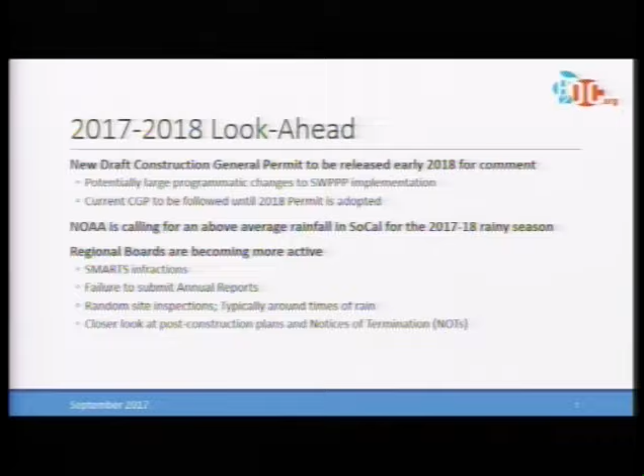First and foremost, I think the most important thing to start the presentation off with is a look ahead at the rest of this year, 2017, and into 2018. I think the biggest thing out there looming is the new construction general permit; a draft is anticipated to be released in early 2018 for comment. The thing to note with this is that there are potentially large programmatic changes to the SWPPP implementation. And I don't want to get too involved in it here today because, again, nothing's set in stone. It's a draft version, but I just wanted to make sure that all of you are aware that after about 10 years, there's finally a new permit coming out.

We're not expecting a lot of changes. It's still going to be a risk-based permit, but there will be changes to inspection requirements, sampling protocols, certifications, and stuff of that nature, which could affect your programs. So be aware of that. In the meantime, the current CGP should still continue to be followed until the 2018 permit is fully adopted.

Another thing to note going into the rainy season is that NOAA is calling for above average rainfall this rainy season. Not expecting as much as last year. Last year was a record year, especially coming out of a period of 5 or 6 years of drought, but we are ramping up and expecting a lot of rainfall. So good that you're all here. Get a refresher on the requirements of your programs, a refresher on the BMPs that you guys will be inspecting and following. So be prepared for some rain.

And then lastly, I just want to touch on the fact that regional boards are starting to become active. In the first 7 years or so of the permit being implemented, we were in a drought. We didn't see a lot of action from the regional boards. There just wasn't much to inspect. Not a lot of runoff, no sampling data, but now that the state has more funding, pushing that out to the regional boards, and we are starting to get rain and discharges from our sites, we're seeing an uptick in activity from regional boards.

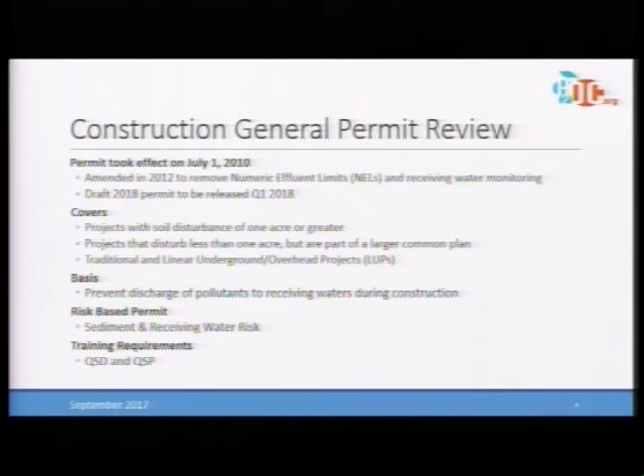It also covers projects that are less than 1 acre, but part of a common plan of development. So the idea behind this was they didn't want land developers to come out and piecemeal segment each one of their pads into a separate project, get permit coverage that way. They have to obtain coverage for their entire site.

And again, it covers traditional projects, which are your typical land development projects. Probably most of your projects are falling under the traditional realm, but we also have linear underground and overhead projects. So your transmission lines, any pipeline projects that are spanning over a length.

The basis of the permit is to prevent the discharge of pollutants into receiving waters during construction. So the most prevalent pollutant on construction sites is obviously sediment, but we're dealing with oils and greases, petroleum products, paints, concrete, and sediment actually acts as a cohesive binding agent, and so these other pollutants will actually attach to the sediment particles and more readily run off the site. So we're mainly focused on sediment here, but note that we're looking at all pollutants coming off a construction site.

Touched on the fact that it's a risk-based permit, and then it has training requirements. So there's QSD, Qualified SWPPP Developer, and QSP, Qualified SWPPP Practitioner, the official designations to implement this permit.

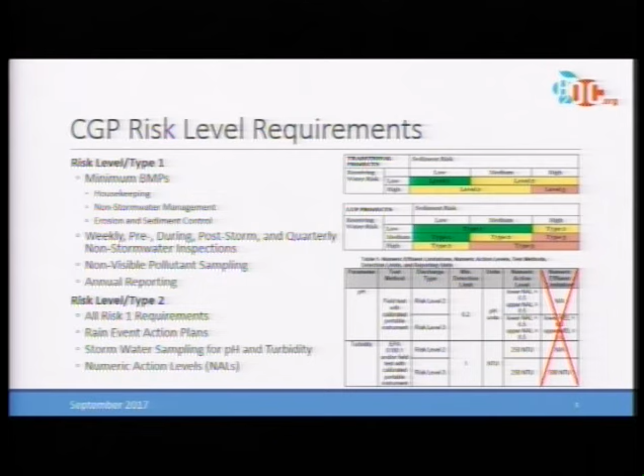We'll also be doing stormwater sampling for pH and turbidity, and we'll be dealing with numeric action levels, shown in this table here. The NALs for pH are between 6.5 and 8.5, so if you're outside of that range you have an exceedance. Turbidity is greater than 250 NTUs.

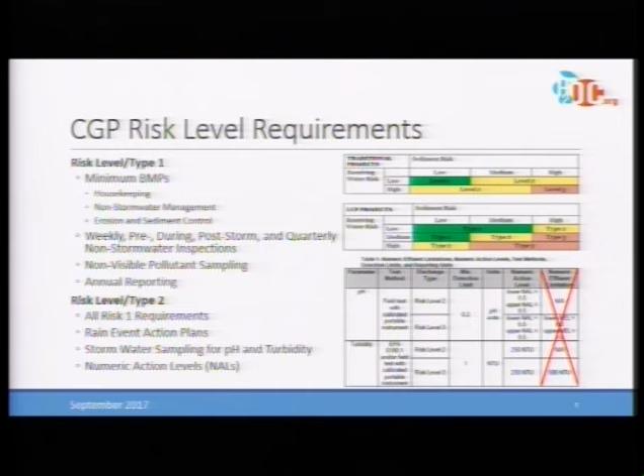What that means is, if we exceed it, we will upload the data to SMARTS, and then it's up to the board if they want to enforce an exceedance action report. Very seldom do they come out with that, but just be aware that if we do have an exceedance, it's not an automatic slap on the wrist. It's just a wake-up call that we might get a notification from the regional board, and that we should be looking to correct the site or any problems we have.

CGP training requirements: SWPPPs, Stormwater Pollution Prevention Plans, must be developed by a qualified SWPPP developer. This entails a 3-day training course. You have to pass the QSD exam, which is basically an exam on the construction general permit covering all the ins and outs of the permit, and then you must have an underlying certification. So Certified Professional in Erosion and Sediment Control, or your PE licensure, will get you there.

To implement a SWPPP, you have to have a qualified SWPPP practitioner, or QSP. A little bit more lenient than the QSD route, it only requires a 2-day training course, the QSP exam, and an underlying certification such as CESSWI, Certified Erosion Sediment and Stormwater Inspector, or CISEC. So a little less experience, more of the practical side, less of the development side. If you're interested in more information on how to obtain licensure, I've included a link here for your needs.

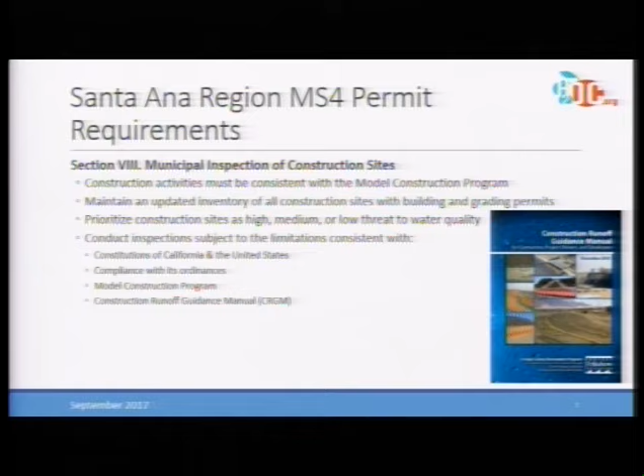There is draft language out there that they will be looking into aligning the priority scheme with the CGP, in that you'll be looking at receiving waters, what your site sediments or soils are, slopes, project size, and stuff like that, to prioritize the sites even further.

The permit also requires that we conduct inspections that are consistent with the constitutions of California and the United States, compliance with its ordinances, again our model construction program, and the construction runoff guidance manual, which is included here on the graphic.

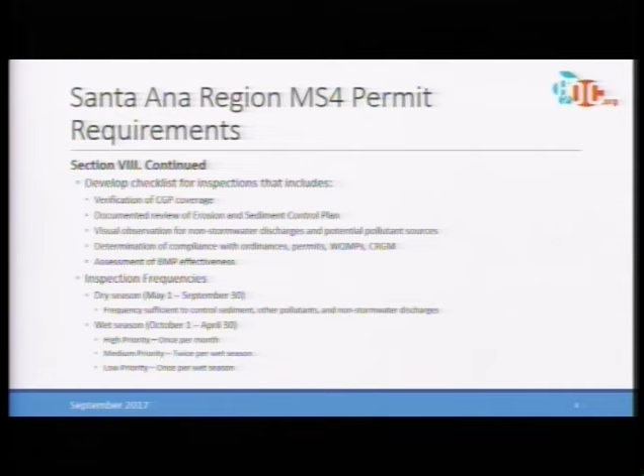Continuing on, you should have developed an inspection checklist that includes verification of the CGP, the WDID number, if the project has CGP coverage. If it doesn't, we need to identify the erosion control plan, making sure the BMPs called out in that plan are adequate for the phase of construction and the season we're in, just making sure all the BMPs are accounted for.

We'll have a section on visual observations of non-stormwater discharges, determination of compliance with ordinances, post-construction requirements, and obviously the most important thing when you're out there, the assessment of BMPs on site.

The permit goes on to explain the inspection frequencies. In this permit, the dry season is officially defined as May 1st through September 30th, and your inspection frequency would be sufficient enough to determine that you're basically in compliance, with no sediment discharges or other pollutants getting off site.

For the wet season, October 1st through April 30th, high priority projects are inspected once a month, medium priority projects twice per wet season, and low priority projects once per wet season. And this is the bare minimum, remember.

I highly encourage more active inspections. It's always good to get out there once a rainy season, twice a rainy season, even if the project's low risk—that just doesn't seem enough. The construction changes daily, the activities change daily, there's always something that's going to go wrong. So especially with the uptick in regional board involvement, I highly encourage more active participation and more active inspections on these sites.

The permit also requires consistent enforcement for non-compliant sites. We have to enforce ordinances and permits at construction sites, modifying our local implementation plans to identify enforcement linkage to the regional board—sanctions, a written enforcement order at the time of inspection, and any other appropriate actions we need to have the contractor follow.

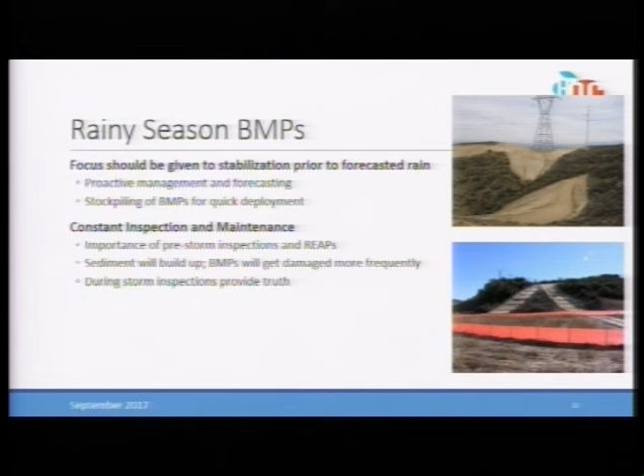The preservation of existing vegetation should be our number one key. The less we disturb, the more success we're going to have with retaining sediment on site and reducing erosion.

I also get that it's not entirely practical to schedule all construction outside of the rainy season. The bird nesting season, which governs over everything and halts construction more often than not, runs February through August—that leaves the rainy months to start grading. So it's kind of converse to what logic would say: we don't want to be grading during the rainy months, but the reality is that we end up exposing large amounts of sediment during the rainy season.

Work with the contractors, understand their schedules, track the weather forecasts religiously, and make sure that you are coordinating to the extent possible to minimize what's exposed to the weather.

Also, I think a huge thing is stockpiling BMPs on site. You go out to a construction site, they don't have enough BMPs, BMPs get thrashed, or you have a violation. During the rainy season, it's hard to come by BMPs in some of the time periods that you need them. 48 hours to get 6,000 linear feet of fiber roll on a slope—it's probably not going to happen. So I really encourage the contractors and you guys to push the stockpiling of BMPs on site for quick deployment.

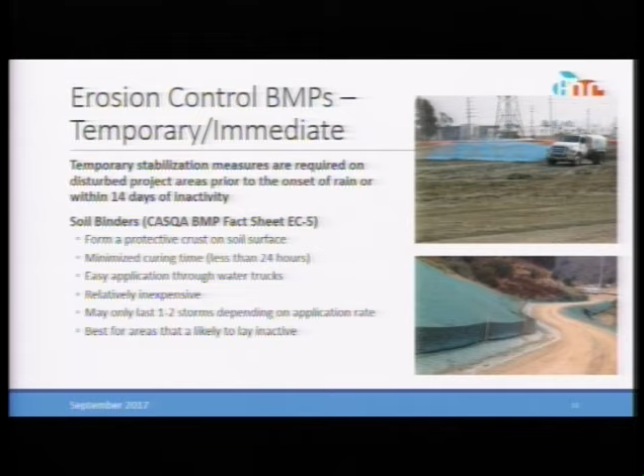The benefit of this is it has a minimized curing time, less than 24 hours. A product I really like to use is called EarthGuard Reap. They state you can apply it during a rain event—I don't know if I'd go that far, but I've done it less than probably 2 hours prior to a rain event, and it hardens onto the slope and works really well. Easy application: you can put it into a water truck, you don't have to get the huge hydroseeding trucks out there with the hoses. You can mix it in a water truck and just spray it on the site. So very easy application, very quick curing time, relatively inexpensive.

The only downside is you're not going to get a lot of extended use off of it—maybe 1 to 2 storms depending on how thick the application rate is. The best use for soil binders is on slopes or disturbed areas that are likely to lay inactive. What you don't want to do is protect a slope prior to a rain event, but then have the contractor come and do grading right after, because that's just going to destroy the binder that's on the soil—it's kind of for naught. So areas that are finished, awaiting final stabilization, are a great use case for soil binders.

Another great product would be geotextiles or mats, BMP fact sheet EC7. We also refer to them as visqueen covers. It's a quick solution for when curing times aren't available.

So if you don't have soil binders stockpiled on site or readily available, and there's an impending rain event, if you have plastic sheeting on site, you can throw that down relatively quickly. It's a little bit more robust, and it's going to last a little bit longer than soil binders, just due to the thickness of the material.

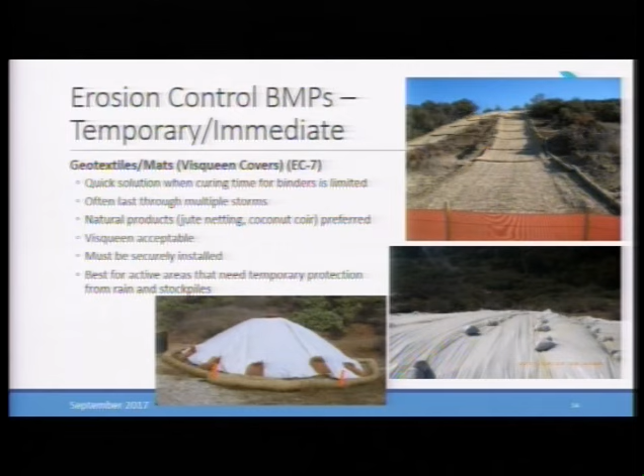But visqueen is acceptable. The CGP, the permit, will allow for plastic. They specifically state that it's to minimize the use of plastics where applicable, but it is acceptable.

But one thing to note with covers is that they must be securely installed. When it's raining, we often experience winds that pick up the covers. So make sure that when you're using plastics, they're securely fastened to the ground. We don't want to cause any extra hazards out there.

These are more for your active areas that need temporary protection, so stockpiles are a good example. You need to cover it prior to a rain event. You don't want to put a soil binder down because after the rain event you're going to come and disturb it again, so just cover it quickly with some plastic.

Slopes that you're going to be continuing to grade, use plastic over a soil binder.

Moving into more of a temporary to permanent control, we have hydraulic mulch or a bonded fiber matrix, BFM, BMP CASQA fact sheet EC3. What this is, it's a wood or paper fiber that's bound with a polymer tackifier and that's going to be sprayed on the ground similar to a hydroseed or a soil binder.

It comes out a lot thicker. It kind of looks like wet cotton candy that's just slapped on the ground. It's pretty thick, looks messy, but holds up really well.

This will last a lot longer than soil binders. You can get an entire rainy season out of it, even longer. The downside is it does take a longer time to cure, 24 to 48 hours in most cases. It's applied via a hydroseed truck.

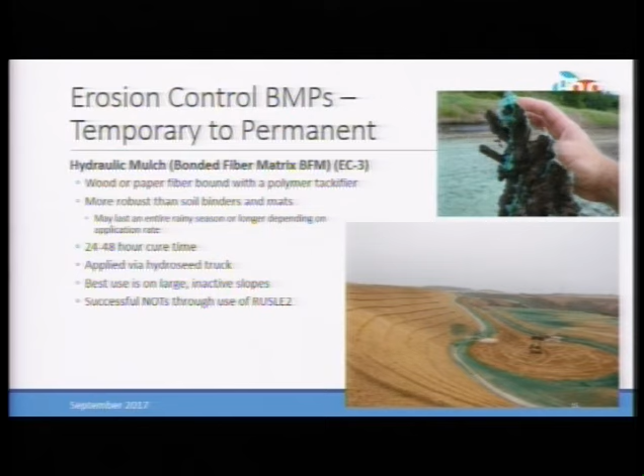With that being said, it's not accepted as a form of vegetation for final coverage. So if you are trying to terminate a SWPPP through the 70% coverage method, the BFM won't work.

However, we have had successful NOTs using RUSLE 2. So if you guys are familiar with the revised universal soil loss equation, it's a different method that you can use in the CGP to close out coverage.

Basically, it's a calculation that determines how much sediment yield you're having from your construction site. The BFM product meets those calculations, so in a way it can be used for final stabilization and NOT closeout.

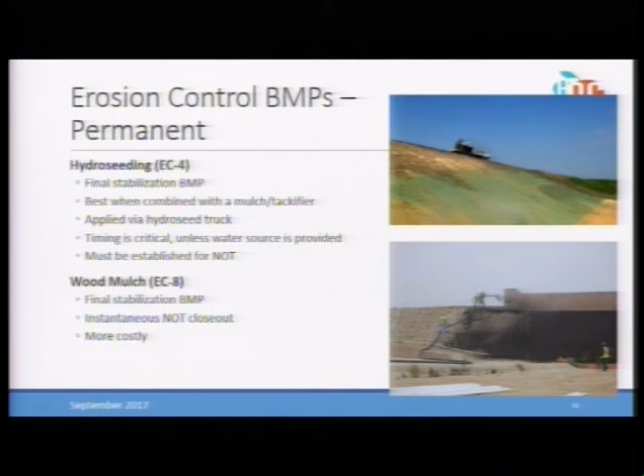Permanent erosion control BMPs, we're looking at hydroseed and wood mulch. Hydroseeding is best when it's combined with a mulch or tackifier. We don't want to just spray seed on a slope. It's not going to stay in place.

After one rain event, it's just going to get washed away. So make sure if they are hydroseeding a site, they have some kind of tackifier in there, something to hold it in place. The timing of this is critical.

More often than not, construction projects will finish during the summer, and we'll see contractors go out and hydroseed a slope in the middle of summer and then walk away with no water source. I don't know how you're going to get any growth without any water.

Ideally, you'd apply it in the rainy season, to take advantage of the rain that you can get. Otherwise, if you're going to apply hydroseed, make sure that you have some kind of water source on it, at least for the first month or two until you have some vegetation coming through. But we need to have actual growth coming through in order to close out a project.

The last one, wood mulch, it's a great product, very expensive, but gives instantaneous closeout. You spray it on and you can get closeout from the CGP.

All right, so moving into sediment controls. These are probably the ones that you're most familiar with.

But again, erosion control is number one. 85% of your success rate is going to come from erosion control. The last 15% is sediment control. I think that's converse to what our knowledge tells us. We go out to these sites and see tons of gravel bags and extra fiber rolls, but really they're our last line of defense. We can't rely on them to keep all the sediment on site. If we have a huge slope failure with a lot of sediment running down, these BMPs are just going to get overwhelmed and we're going to have to replace them.

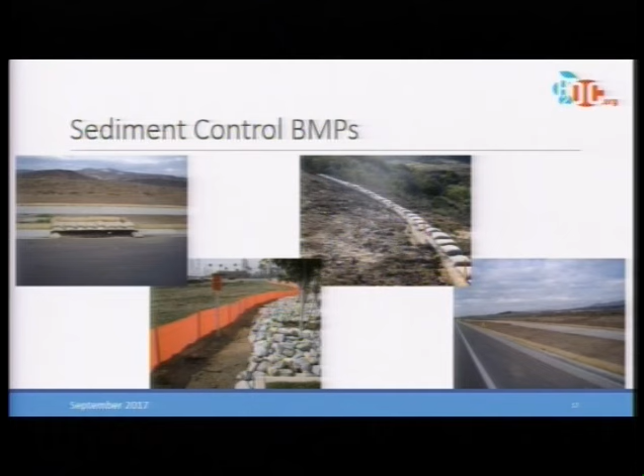Coming into some other ones, my personal favorite is the cutback curb. If you're familiar with SE3 sediment traps, the cutback curb is kind of like a mini sediment trap. A lot of home developers use this where they'll grade down about 3 to 4 inches behind the curb and essentially form a mini sediment trap for each housing lot. This saves a lot of overall BMP maintenance. Instead of installing silt fence, they just have that extra holding capacity behind the curb. So that's a good one to use.

Storm drain inlet protection is another good one to use. However, we're seeing more and more often requirements to remove this during the rainy season because of flooding issues. If that's the case, we typically like to have the filter fabric down and the gravel bags blocking it to catch dry weather flows or any dust. But prior to a rain event, we'll want to make sure we're pulling that back, not impeding any water.

But if we do that, we need to make sure we're controlling the source. So if we're taking the control away from our discharge point, we're going to have to make up for it somewhere else—maybe with an extra perimeter control on our site. We have our fiber rolls, straw wattles, silt fence, I guess a combination.

Something we can use in place of silt fence would be ERTEC S fence. I think it's a relatively new product, but it's very robust. It's a lot better than silt fence—cheaper, easier to install, and you can get a lot more use out of it. I've seen people pull it out at the end of a construction site, shake it out, and then use it on a completely different site. So ERTEC S fence is a good option to look into.

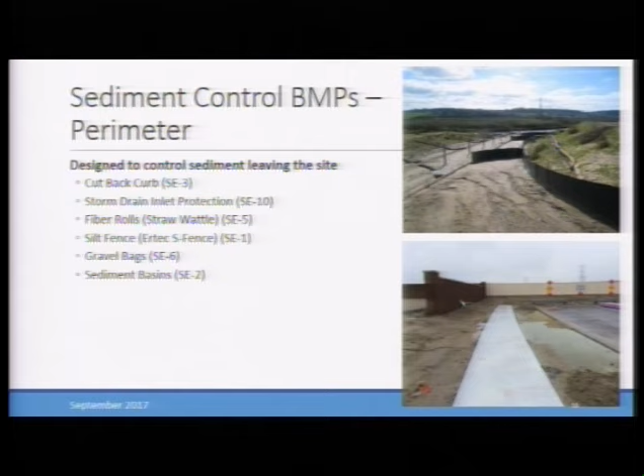So how do we mitigate that? We install silt fence check dams every so often going down. You're going to have the water concentrating along the backside of the silt fence, protecting the hillside, but you're also going to have check dams to slow and break up the concentrated flow path as it goes down the access road.

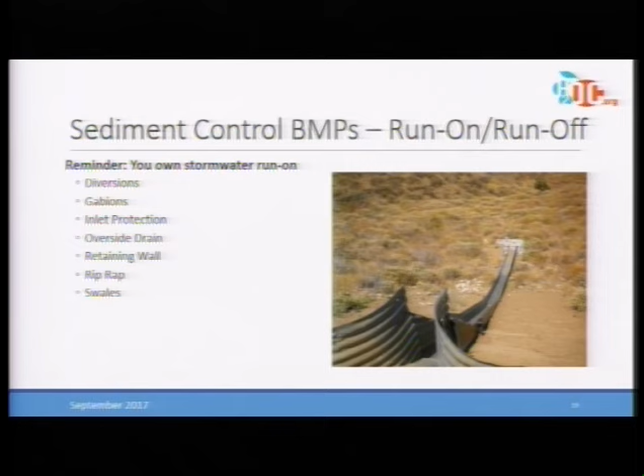A reminder that under the permit, essentially any run-on that's going onto your site, you own it, so best to divert it around your site as much as possible. If not, make sure it's clean when it comes on and clean when it goes off. So how can you do that? You can have diversions, gabions, you can pipe it through your system, or just have a robust system of perimeter controls to make sure that everything coming onto your site is as clean as possible.

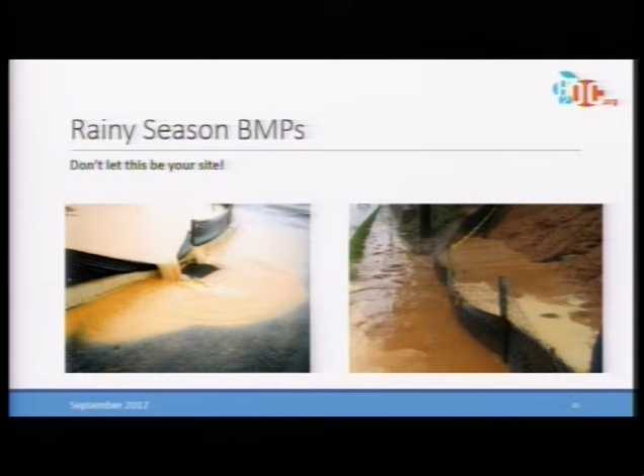So this is a couple pictures of where we don't want to be. We don't want our silt fence with that murky water coming over and going straight into the storm drain. That's a big no-no. The public can see that, and that's going to raise a lot of issues. All right, any questions on BMPs? All right.

All right, so moving into inspections. The purpose of the inspections: we want to identify and correct BMP failures, but we want to go a step further and be forward-thinking. We want to be able to identify and correct potential failures as well. Like I mentioned earlier, it's a lot cheaper and time efficient to identify problems before they start. So when you're going out to these sites, don't just look for something that's happened in the past, but look for areas that might be a potential source for failure in the future.

Pay attention to where sediment's building up, or if you see a rill forming, make sure that we're addressing that before it becomes a larger issue. And then obviously we have to do this as part of the MS4 permit that we're working under. What are we inspecting? We're inspecting areas that haven't achieved final stabilization. We're going to be inspecting our erosion and sediment control BMPs and our housekeeping BMPs.

This is a thing that's commonly overlooked. We go out there thinking, okay, we need to check the sandbags, the gravel bags, make sure they're all buttoned up, but we fail to look at the contractor's yard, and that's one of the main sources of pollutants: where the equipment's parked, making sure that everything underneath the equipment is clean, there's no leaks or spills, proper trash pickup on sites. So really going into the nitty-gritty, the housekeeping issues are equally important on sites.

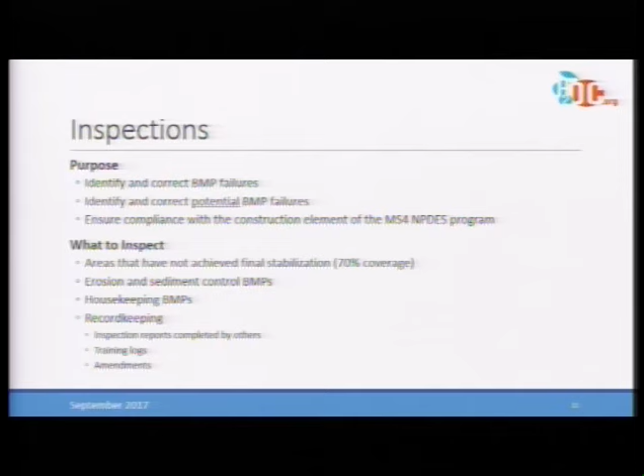And then record keeping. We also need to be cognizant of the record keeping that the contractor is doing. Are they completing their inspection reports? We mentioned that the CGP requires weekly inspections. Is the contractor doing this, and is it stored in the on-site SWPPP? Are they providing the training that they need to? Anytime a new contractor comes on site, they need to be trained, and that documentation should be kept in the SWPPP. Are there any amendments to the SWPPP?

Has the SWPPP expired? Should they have done a COI to extend coverage? Have they removed any project areas? All that stuff should be kept in the SWPPP. The SWPPP is a living document. It needs to be updated consistently, and it needs to reflect the exact site conditions. So when you're going out there, look at the site map on the wall. Make sure the BMPs that are called out there match in the field.

All right, so how do we inspect? I know we become creatures of habit, but the most important thing is safety first. The CGP actually put statements in there saying that if you feel unsafe at any time, you don't have to go out and inspect. You just need to fill out an exemption record. We all want to go home at the end of the day, so make sure that you are conducting these inspections safely.

I think that starts when you get on site: make sure you always check in with the construction site manager. It's not only courteous to do that, they want to know who's on their site, who's walking around, but you can get a lot of valuable information out of the construction site manager. It's probably been a while since you were last on site. Conditions might have changed, construction activities might have changed. It's good to walk through and ask about any additional hazards, any areas that are off limits that you can't go and walk and inspect.

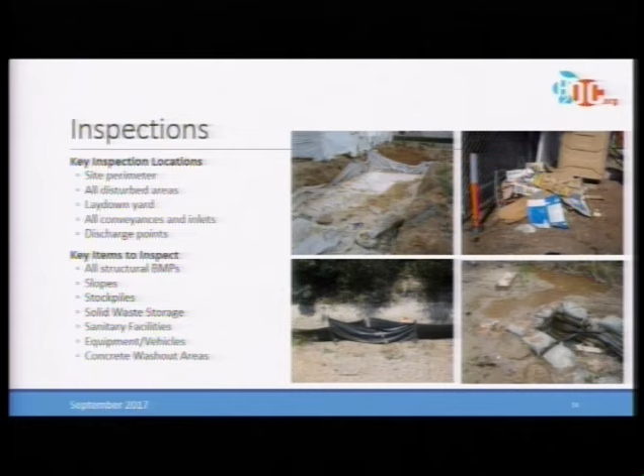We want to look at slopes, going back again to the importance of making sure that everything's staying on the slopes. That's our first line of defense. Stockpiles, solid waste storage areas, sanitary facilities, equipment and vehicles, and then concrete washout. Any experiences from you guys that you want to share with what you've seen out on sites, or any questions on inspections? Okay.

All right, so let's get into managing a site proactively. I think this can save a lot of money, a lot of headaches if done properly. So the first thing that you want to do is really understand the permits. And I know this permit's been around for 7 years or so. You have your programs in place, you have everything that you've been doing for the past years, but note that there's always gray areas. There's always different interpretations.

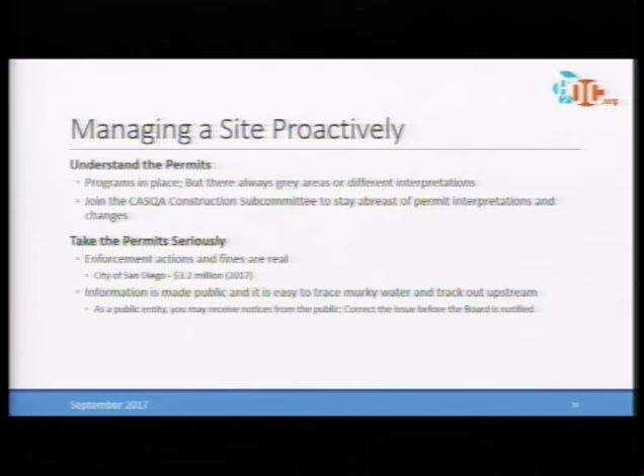Different regional board inspectors, there's turnover in staff, there's different things going on, and so there's always going to be different interpretations. So make sure that you understand the caveats of the permits, how different types of inspectors interpret things, and just really understand that. Another thing that I encourage, if you have the time, is joining the CASQA Construction Subcommittee. This is a subcommittee that has a conference call once every 2 months, and they'll discuss the inner workings of the permit, any gray areas that come up from discussion, any changes that might come in the 2018 permit.

They'll go over that kind of stuff and keep you updated on what their interpretations are from experience working with cities, working with the counties, working with regional boards. So you might find some good tips in those calls, and it's free to join.

The next thing is take the permits seriously. Enforcement actions and fines are real, and I think the latest example of that is the city of San Diego. Last year it was fined $4.5 million. They fortunately got that reduced down to $3.2 million, but that's still a lot of money.

And the important thing for us to know as the city agencies, a lot of these fines are often passed back to the contractor for negligence and not following the spec language. But this fine in particular was issued to the city of San Diego for programmatic errors and inspection shortcomings. So the fines are out there, they're real, and they will come after cities as well. And this one, I don't think that they can pass off any of the fines to contractors, because this was due to their own negligence.

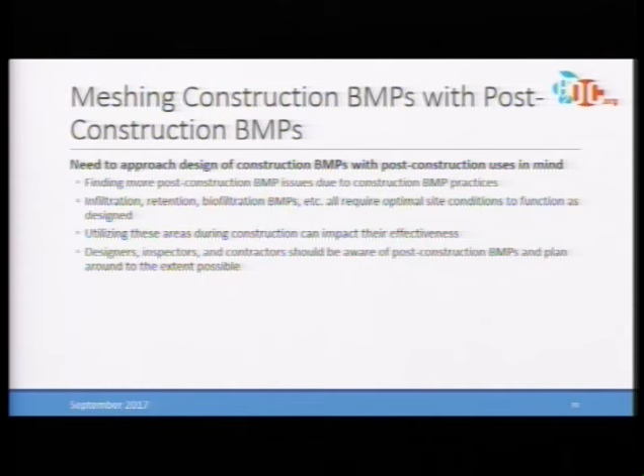All right, so I'll briefly go through this. I know Brent's going to talk about this, he has some pretty good examples, but one of the issues we're seeing with our sites during construction is post-construction BMPs—water quality basins, pervious pavements, anything that needs infiltration or biofiltration. We need optimal site conditions; we need the soils to be able to infiltrate. When we're going in and doing construction, typically we'll compact soils down, we'll be driving equipment where we shouldn't be, and we'll be adding extra sediment that's going to clog the pore spaces of these proposed post-construction BMPs. So it's another thing for us as inspectors when we're out on sites to understand what these post-construction BMPs are, where they're located, how they work, and how we can mitigate any issues arising from construction into post-construction.

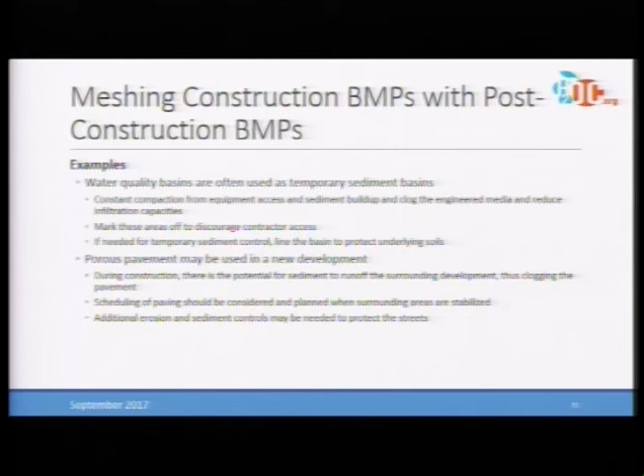So looking at the examples—a water quality basin going in, you're going to have constant traffic from vehicles going back and forth. It's going to compact down the soils, reducing infiltration capacity. You're going to have sediment coming down that you're storing from a rain event, and the fines in the sediment runoff are going to clog the infiltration capacity of the water quality basin. So how can we mitigate that?

We can discourage access by putting up ESA fencing or some kind of designation saying, once we've graded this basin, you can't access it. If we are going to use it for temporary sediment control, just make sure it's lined so we're not clogging up the soil underneath.

Porous pavement, scheduling here is a big one, and I know Brent will talk about that. So just make sure that when you are putting in pavements, if there is active construction going on, we have proper BMPs in place, perimeter control BMPs, sediment control BMPs to prevent as much sediment running off into these streets, clogging the pavement.

Any questions on post-construction?

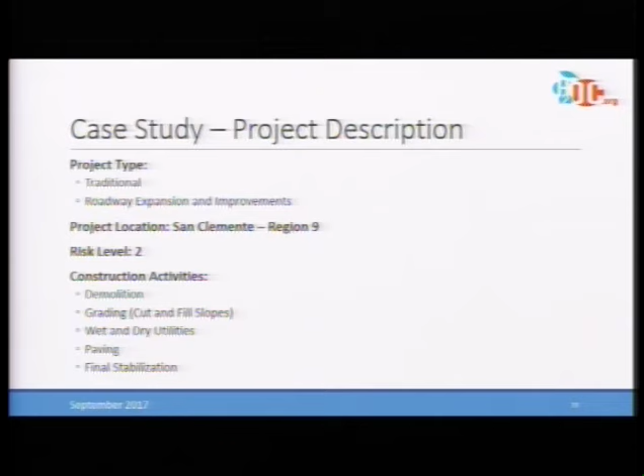All right, so we'll look at a case study project. This happened last February. It's a pretty large, traditional project. It was a roadway expansion project, roadway expansion and improvements. 34-acre site located in San Clemente, which is Regional Board 9, San Diego region. It was a risk level 2 project, and the construction activities included demolition, grading of cut and fill slopes, wet and dry utilities, paving, and final stabilization.

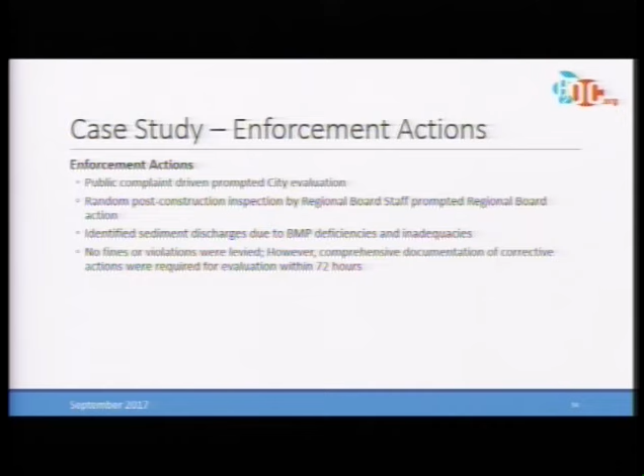So in February, we had a pretty large storm event, and we received 2 different complaints. We had one complaint from the city, which was enacted by the public. There had been some sediment discharges onto an adjacent property, and so they had contacted the city. The city came out, did an inspection, saw that, hey, yeah, they are right. There's a lot of sediment coming from this construction site onto this private property.

We also had a random post-storm drive-by by one of the regional boards. Luckily, they didn't go onto the site, but they drove by and they noticed the risk level 2 project was missing a lot of BMPs, no slope controls, especially prior to a rain event. There was exposed soils. There was missing BMPs. BMPs were damaged. So pretty much everything that could go wrong went wrong, and we got an enforcement action from the regional board.

Luckily, there were no fines or violations issued. It was just comprehensive documentation that they wanted to see. They gave us basically a 72-hour window to get corrections out there. I mean, 72 hours on a 34-acre site prior to the next rain event is still just a time crunch.

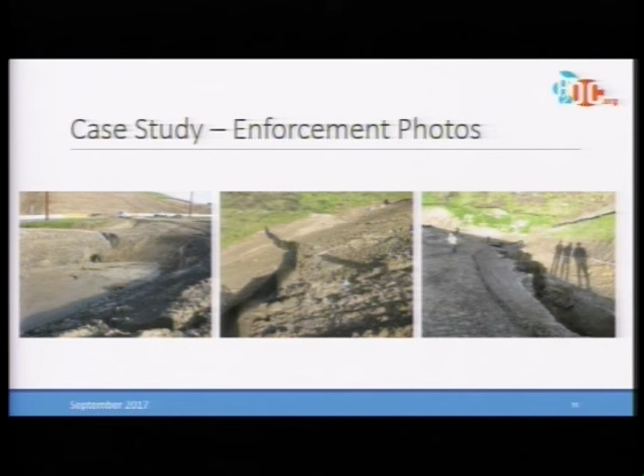Looking at these, the furthest left is kind of the perimeter of the project, culvert going under the roadway there, but you can just see the amount of sediment that's building up and clogging this culvert, but really no BMPs in place. All that sediment's running off onto private property. Terrible. We can't have that.

The middle photo, in the foreground, we're showing just some rilling and some erosion happening along that slope. And then if you look at the large slope in the back, you can see that it's completely missing any face controls. No sediment BMPs. That's probably a 2-to-1 slope, if not steeper, and the permit requires for risk level 2 that face controls be installed every 10 feet.

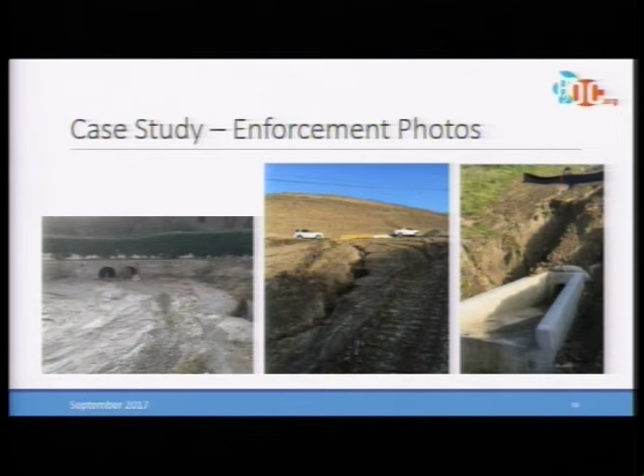We have nothing. And then the far right picture shows kind of an outlet structure, but you can see that no water's getting directed into the pipe. It's all diverted around. It's creating major erosion, and it's decreasing the integrity, or hurting the integrity of that system right there.

Very, very terrible site. And it kind of goes back to us, not only the first line of defense is going to be the QSP, the contractor's QSP, but us as inspectors, how do we let stuff like this go, especially in the rainy season? So we need to be aware, we need to be proactive, we need to be on top of it.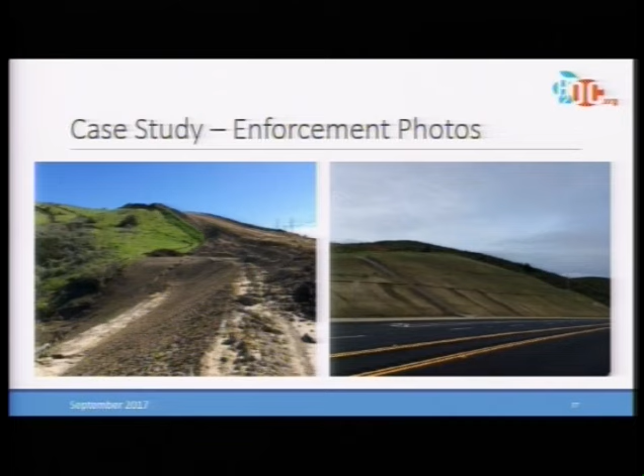What we could have done there, conversely, is install burlap wrapped fiber rolls. Those can be left in place long term, they'll biodegrade over time, but that would have been the solution there. In this case, we had to go out, have them rework the slope, compact it, reseed, and reinstall the burlap wrapped fiber rolls. A case of something that can happen is you think a slope's done, it's been hydroseeded, but it's not fully stabilized until it's actually stabilized.

So what did we do? We didn't make excuses. We got together as a team, did a comprehensive site review, involved the contractor, the contractor's QSP, county personnel, and county inspectors. We all met together, got in the same room, went through the permit requirements, identified the shortcomings, and put a game plan together, all within 72 hours.

We realized that 72 hours wasn't enough time to get this all implemented prior to the next storm event. So we came together with a game plan to identify the immediate threats, the most important things we could address before the next rain event: cleaning the clogged storm drains, removing sediment buildup in the basins and behind controls to give us extra capacity, installing sediment controls along the inactive slopes since that was a huge comment from the regional board, and adding temporary stabilization to active slopes.

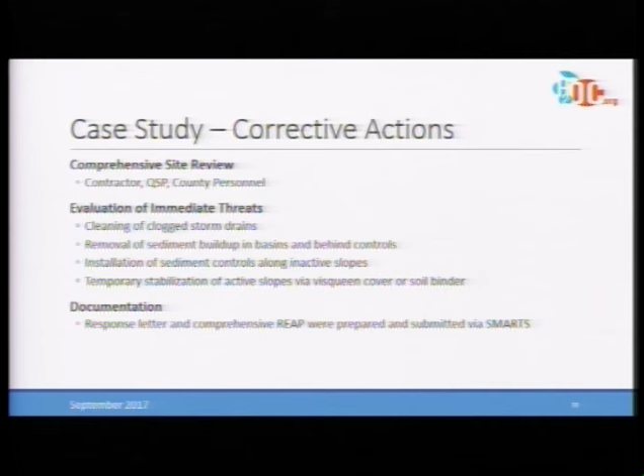You can see in this photo here. The left picture is a good example of working with the contractor. After talking, we told them, okay, you're going to have to stabilize this entire slope. They said, we're still actively working it. After this storm event, we're going to go out there and regrade it. So we said, okay, well, what can we do to minimize the potential for sediment to come off this slope?

What we settled on was building a berm along the edge of the road and directing all the water down to the spillway, you can see the Visqueen spillway there. So instead of having the water run off directly down the slope into the culvert, we directed it towards the spillway, and then we had additional BMPs at the bottom. Not necessarily permit specific, but it was a compromise we were willing to make in order to keep construction going and meet compliance.

The picture on the right shows a slope they were actively working, so they chose not to hydroseed it or put a soil binder on it. They decided to put down an enormous amount of plastic instead. They figured it was more cost effective to put the plastic down and then rip it out and go back to grading rather than applying soil binder every 5 days, because it seemed like we were getting rain every 5 days last year.

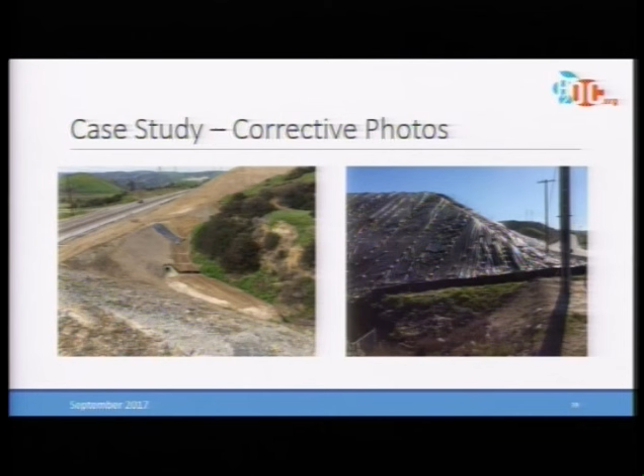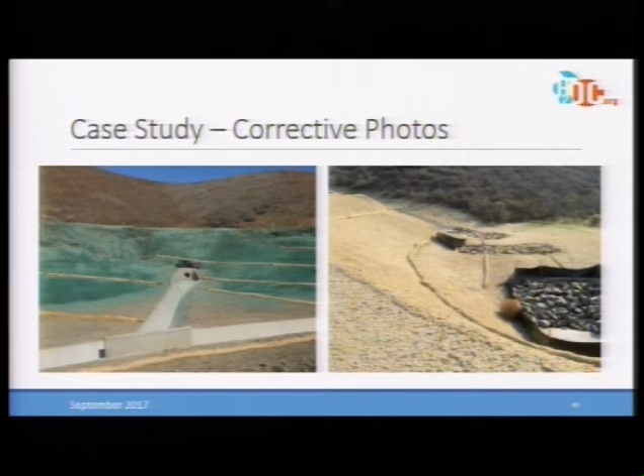These two pictures here, the left shows the application of soil binder. This was an area that they were not going to touch for a while, so they decided to go with the soil binder to secure it. The picture on the right shows the application of hydromulch, an area that was going to be untouched for even longer. So they decided to go the more expensive, robust route and put the hydromulch down.

So what are the lessons learned from this? The public and the regional boards do respond. Everything's shared publicly on SMARTS, and construction sites automatically have a target on their back.

A recent example I had was a home development project with some discharges into a lake with pollutants. The homeowners association came straight after the contractor, didn't even look into the source of water, just assumed it was coming from the construction site. They said, you guys are polluting our lake, you're killing the fish.

But we went out there and did our due diligence. We traced the water back upstream, and it was actually another home development upstream overwatering their lawns for the grand opening of their development, so fertilizers were flowing off into the lake in dry weather. The homeowners association didn't even bother to look at the real issue; they came directly after construction because they automatically assume pollutants are coming from a construction site. So always keep that in the back of your mind.

We also learned that enforcement actions, even without fines, can be expensive. The additional BMPs we had to install, plus the labor, all had to be done within 72 hours. A lot of people worked overtime trying to find 10,000 feet of fiber roll in 3 days. It's an enormous amount of effort.

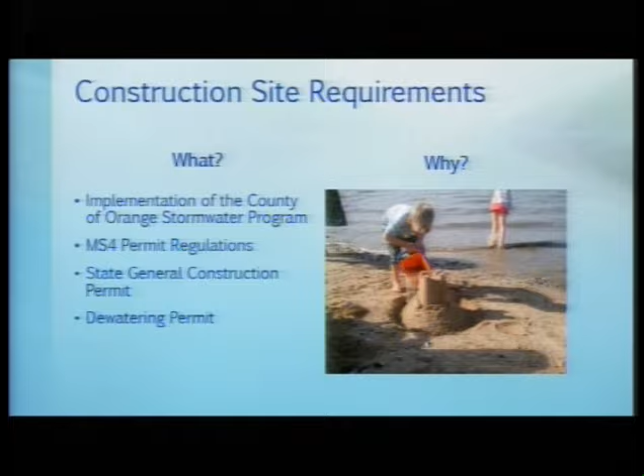Our responsibility is to implement the County of Orange Stormwater Program, which puts us in compliance with our MS4 permits. If we have projects that are an acre or larger, we'll have to include the state general construction permit project requirements, and if your site requires dewatering, there will be dewatering permits out there. Mainly, we're doing this to prevent pollutants from getting into the creeks and local rivers and then out to the ocean. And if you note, this little boy doesn't have any stormwater measures around his moat out there.

Our inspection obligations vary for different types of projects depending on the size. But our MS4 permit obligates us to inspect at a frequency sufficient to ensure sediment or pollutants are not getting into our MS4 system. And if there is a violation to that requirement, and we are noting BMP deficiencies, we're obligated to go out and inspect on a weekly basis until it is brought up to compliance.

Construction projects are not defined by the duration of time they will be taking, but by the activities. Recently I've been hearing that projects less than a month, less than a couple months, are not being inspected. However, the permits don't have that in there—that if it's less than a certain amount of time, they don't need to be inspected. It depends on what activity is being done on that construction site. You could have a two-week project that is discharging cement materials, or has construction materials getting pollutants into the waterways, and that's still a violation. So it needs to apply to all construction sites, not depending on the time it's going to take.

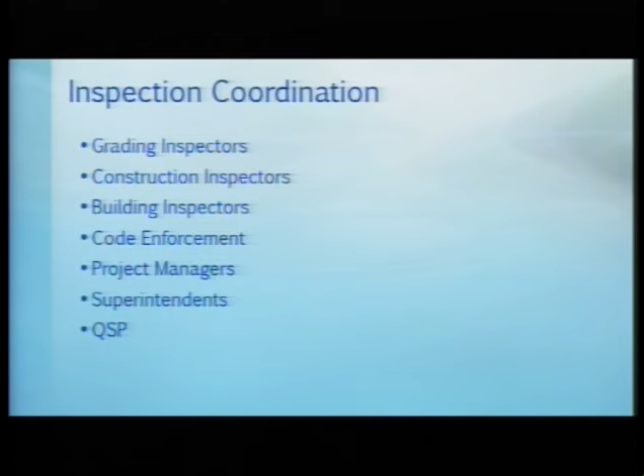Each jurisdiction has slightly different inspection coordination. With the county, we have NPDES coordinators who go out to inspect NPDES specifically. Some of the cities just have grading inspectors that do their NPDES inspection. Most of the time, there's a transfer of responsibilities with your building inspector or code enforcement. So it's a good idea, prior to the wet season beginning, to find out who's going to be out there and how you can coordinate communication between them.

Earlier we were all talking about how oftentimes the QSP is working for the contractor. But if you can develop a good relationship—which I know doesn't always happen—at least have a way to communicate with them, whether it be email or phone calls. It's going to help everyone in the long run.

And we all have those certain projects. It may be a developer that transfers from one project to the next, but we know that there's going to be those problem projects. You want to get out to them early, and you want to let them know that you're going to be out there looking at these things and making sure the things that they put in are being maintained.

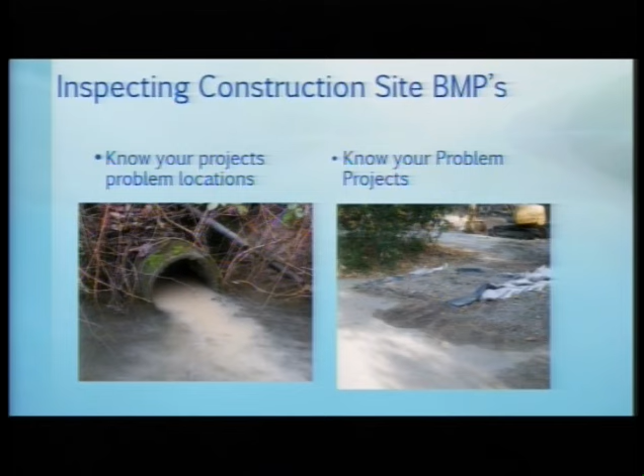And know where each of your project's problem locations are, whether it be something like what Andrew was talking about. You've got a run-on that we need to make sure is going directly through the project and not infiltrating into the construction, or some type of problem that you can anticipate will occur if there is a rain event going through that project.

And because we're into the second and third week of September, we want to start seeing that your projects are preparing for the wet season by getting stockpiled BMPs. A lot of times they can't be implemented all at the same time, but they should have measures available in the event of a forecasted rain event. So you'll start to see your inlets being protected and your storage areas and materials that are available to do that in the event of predicted rain.

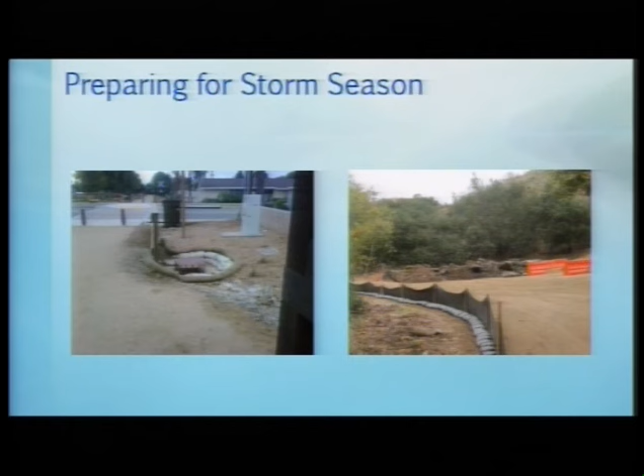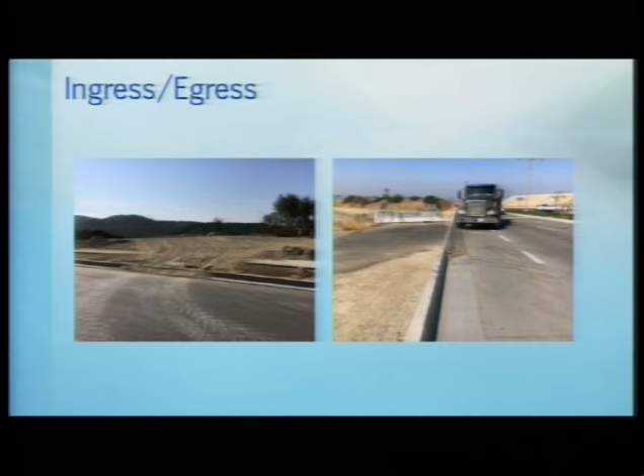Looking at your ingress and egress, there are different requirements in different cities, but we know that tracking on and off of our projects is likely to have the public or possibly the regional board coming out to take a look at more things. We want to make sure that we're maintaining the stabilized construction entrances on the different types of projects you have.

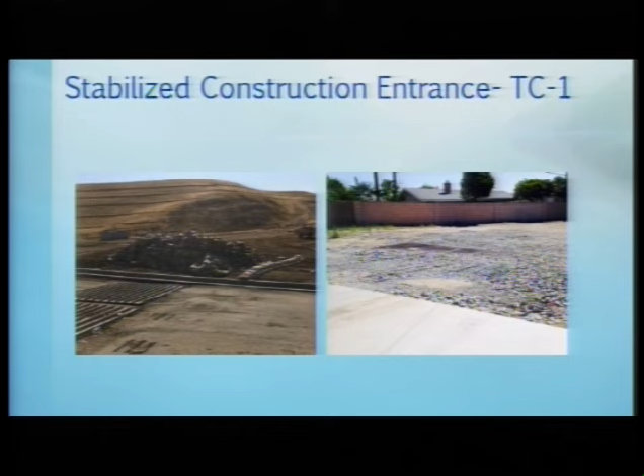And waste management, again, is having enough materials to cover your stockpiles when it is necessary, whether it be rain or winds.

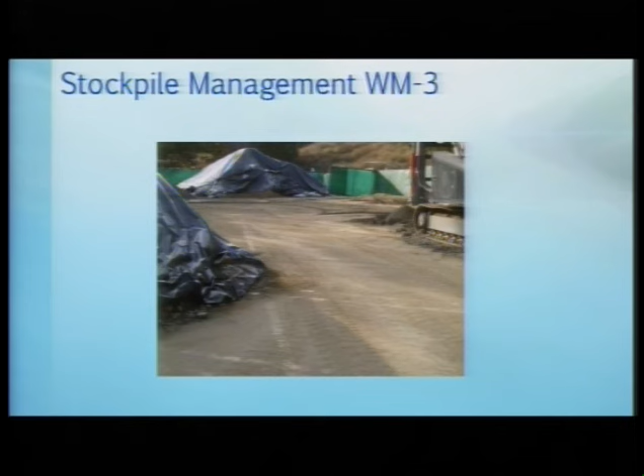And I have a few pictures of some larger projects that were outside of my jurisdiction. When the slopes are completed, even if it's not a month before the rainy season, you need to start getting them protected. So they have the combination of erosion controls and sediment controls with the bonded fiber matrix and fiber rolls, and sediment controls at the bottom with the silt fence.

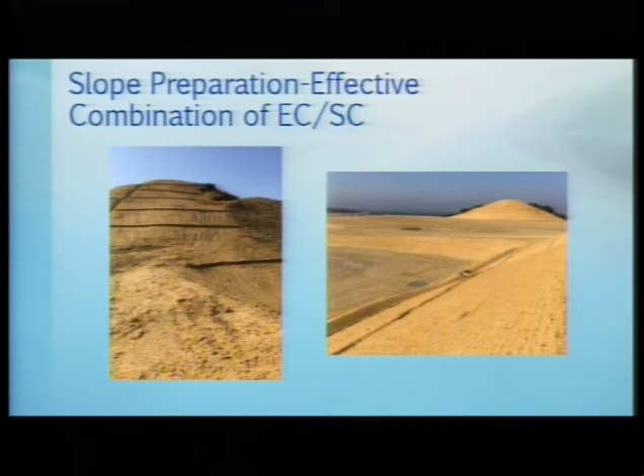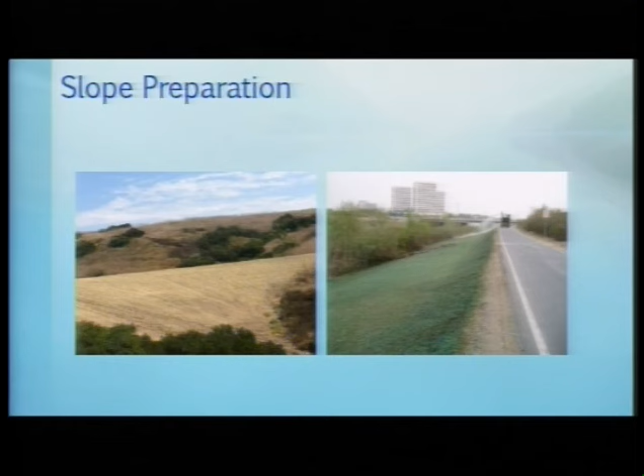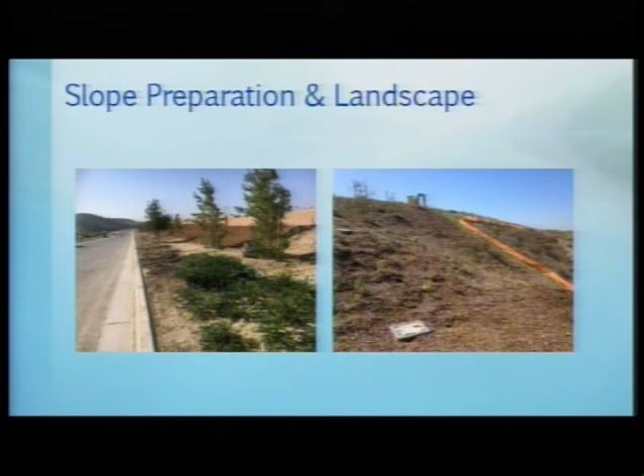We have a slope that was track walked, and then another area of the same project was being hydroseeded. And in order to get final notice of termination, you're going to have your landscaping in and established, so they can do the planting and then add the wood chips, which, as was mentioned, is an automatic final stabilization in your notice of termination.

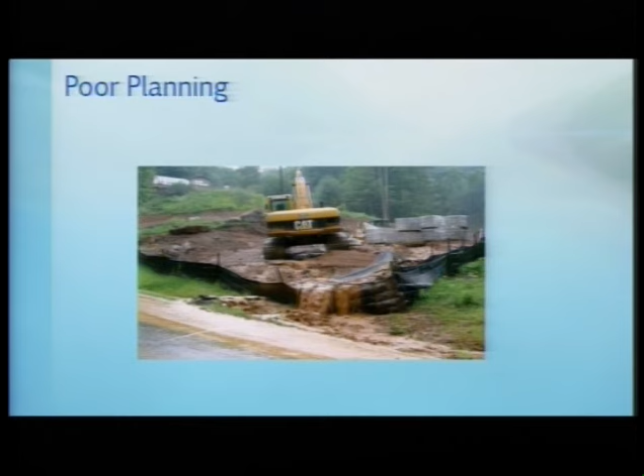So I'm going to briefly talk about one of Orange County Parks' drainage repair projects. We have Orange County Public Works Construction Division working on it right now. The area that is in question was developed by the Irvine Company back in the 70s, and we were able to obtain one of these aerial maps that shows where the mass construction was going on.

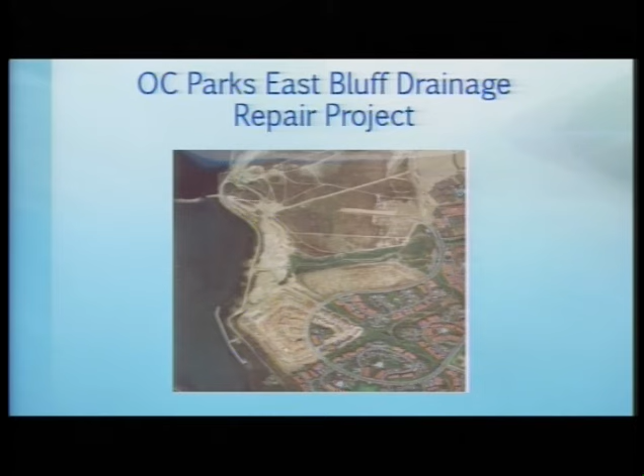And a typical thing, the county accepts property from the Irvine Company in different deals, and about the late 80s, we accepted this piece of land, and later found out that the city of Newport Beach's catch basin drained through a 36-inch CMP, and the end of the drain was infiltrating into parkland, into a wide open trench. And that water was continuing through an open channel, and then it was going to tie into a 30-inch concrete-lined corrugated metal pipe.

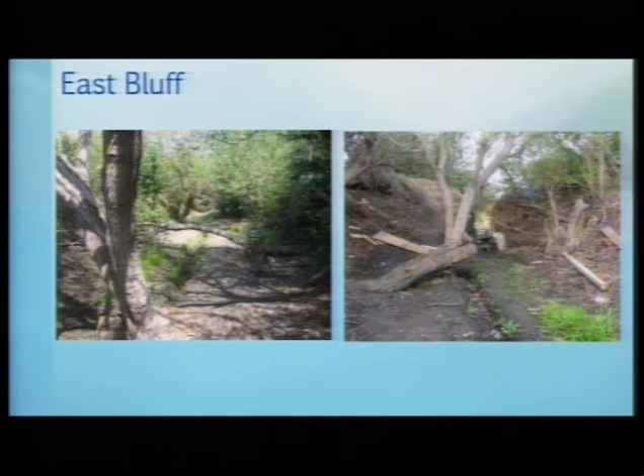So this is the area where the water was just traveling through, and at high storms, it would go about 3/4 of the way up the bank and carry some of the wood debris and the natural leaves and things, would head down the open V gutter, and it would get to an area where the top of the pipe at the bluff was wide open.

And when county park rangers took over this area, we had trails going through, and their number one thought was the safety of this open pipe. So they decided to put a chain link fence over it. That was in the early 90s, and the next few years of storm, the debris covered up the chain link, which covered up the pipe, and the water took its own direction to get down to the low point of the bluff, which is the Back Bay Drive.

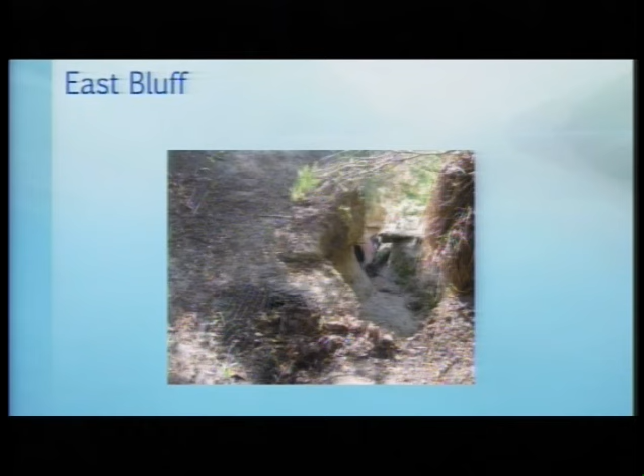So the water eroded and created this giant gully and exposed the concrete-lined corrugated metal pipe. About 2006, when Environmental Resources staff, which was Watershed at that time, went out to take a look at it, they realized that we needed to repair the pipe and replace the slope.

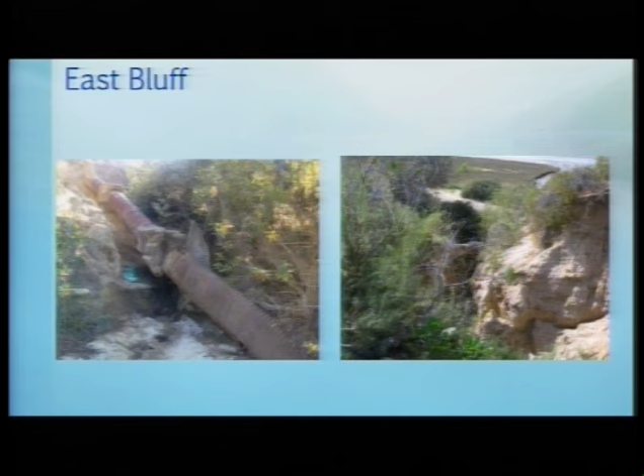There was a year of large storms, and I think it was 2003, so they applied for FEMA money to get the project going, but were denied the money, so the project sat vacant and still for another few years. So the pipe continued to erode, and this was dry weather runoff that was dripping out of it on the right up there. And on the left, during the storm season, what was happening was the water that was still going through the big channel it created was carrying sediment down to the inlet that crossed the road.

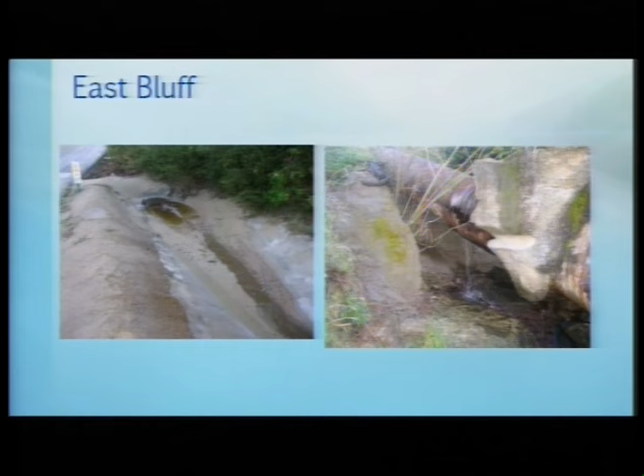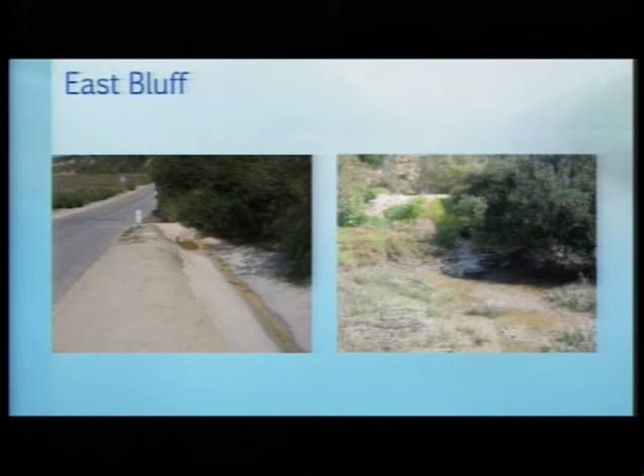So this is just an extra picture of where the water comes down to the road and then where it exits. The sediment was building up and getting out onto the Back Bay Drive, and that was in 2012, crossing over and getting to Upper Newport Bay, which is an environmentally sensitive area, 303(d) listed for sediment. So at that time, both the county and the city were issued notice of termination, notice of violation by the Santa Ana Regional Board.

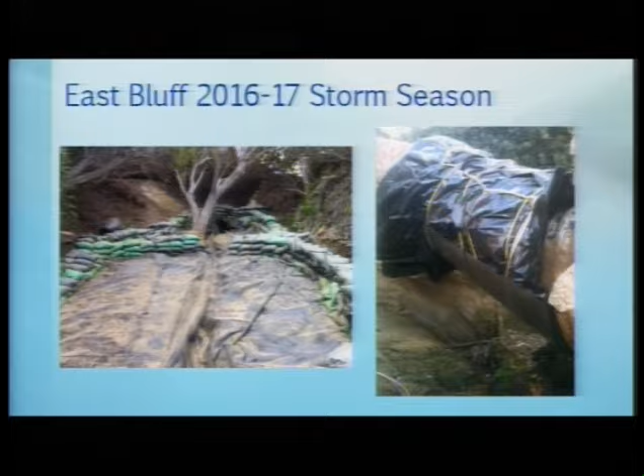During this time, we had to get Coastal Commission permits, Army Corps of Engineer permits, Fish and Wildlife permits, and continue moving forward with trying to get the project going. So when we calculated out the project, it turned out it was 1.12 acres, and we were going to have to apply for the construction general permit. And it was a risk level 2 because of the environmentally sensitive area it was draining towards. And construction division, when they took it over, were getting ready to put it in the SMART system and decided to apply for a low erosivity waiver through the State Water Board, and they actually were issued the waiver pending that we could complete our construction by October 23rd.

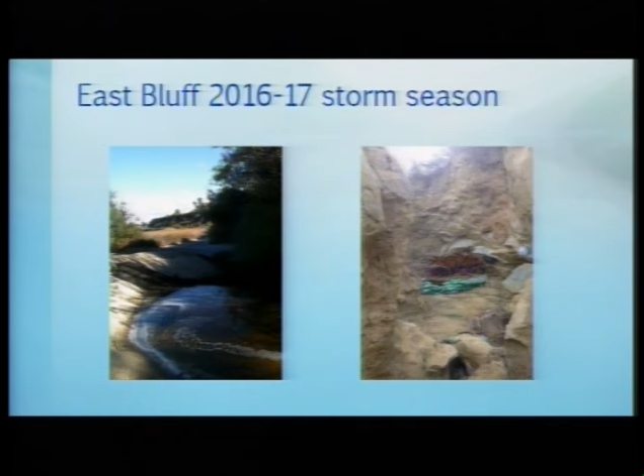So we were planning to start our construction at the end of July, but when we did our bird monitoring survey, we found a bird. So that delayed the project again another 3 weeks. They did end up starting construction August 14th, and the contractor out there is doing a really good job trying to keep on schedule to get completed so we don't have to get a SWPPP with level 2 requirements. So I've been out there a few times. They implemented their perimeter controls, and they've had to contain the flow, which is really just dry weather runoff from the city storm drain pipe, into a basin area, and then they pump it into a water truck and use it for dust control.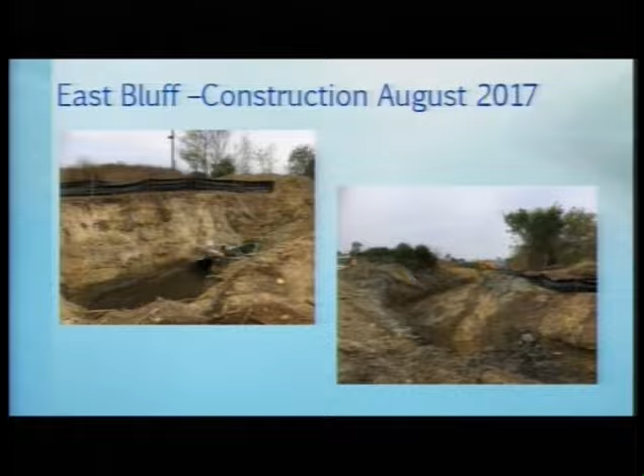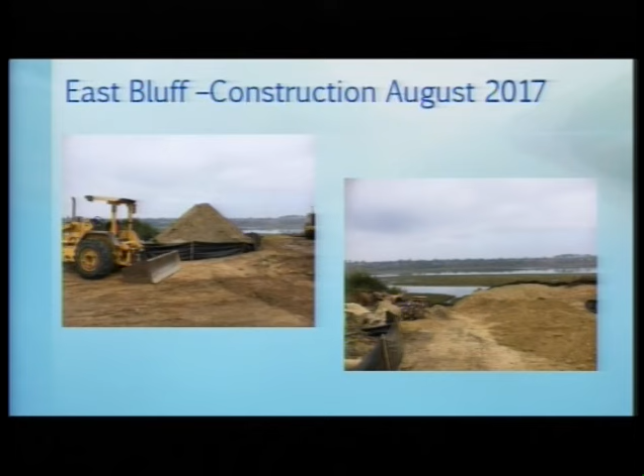So my biggest concern is they don't have a SWPPP out there to go out there and enforce. They have an erosion and sediment control plan. So I'm just out there making sure none of our MS4 permit obligations are being violated. Right now, they have stockpiled materials and all of the BMPs necessary when the slope is completed to be implemented, but because the construction is across pretty much the entire site right now, we just have them stockpiled and are monitoring the rain events. And our downstream end is along Back Bay Drive, and they have the pipe that crosses under and goes directly into the bay blocked off and additional sediment controls in place.

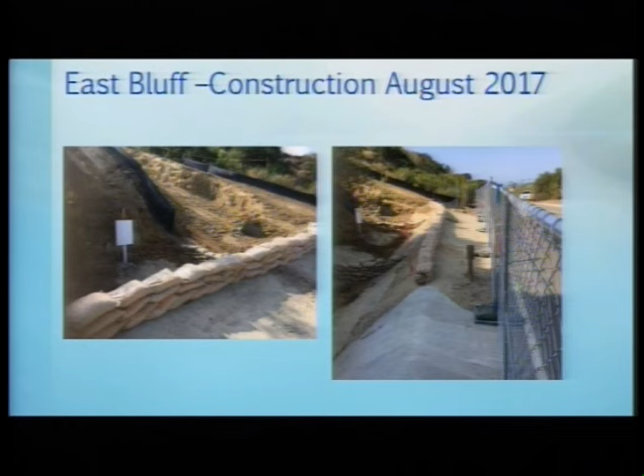And the pipe that exits into the Back Bay, they are not allowed to work in the bay. Their Coastal Commission permit doesn't allow anything to be set into the bay, so this is a bridge they've created to put in their BMPs on the downstream side when they do line the pipe that goes underneath the Back Bay Drive.

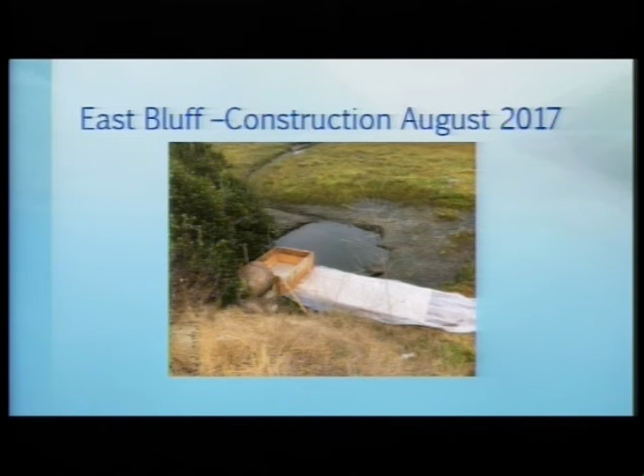And just the last two things that I wanted to present to you guys is I get one of these publications called the Monthly Dirt, and the one that came out in March and April was talking about how some of the Central Coast regional boards have come up with a way to encourage contractors to do the right thing.

When they get a notice of violation, they're requiring LRPs, QSPs, the contractors, and some of the subcontractors to go to 2 or 4 hour trainings taught by our trainer of record from the state of California. I thought that was a pretty good idea to get them out there to learn a little bit more rather than just fine them.

And also, if anyone needs any continuing education units, the Stormwater Awareness Week, which is a free way to see online through YouTube videos, that's coming up, and you can find that at Stormwater Awareness Week.

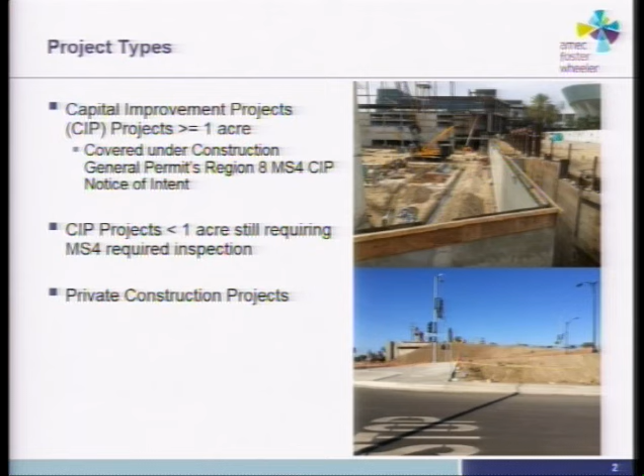They have the CIP projects that are less than 1 acre, road projects and things like that that still require the MS4 inspections. And then they have the private construction MS4 inspections as well. So I'll be going through some of those projects.

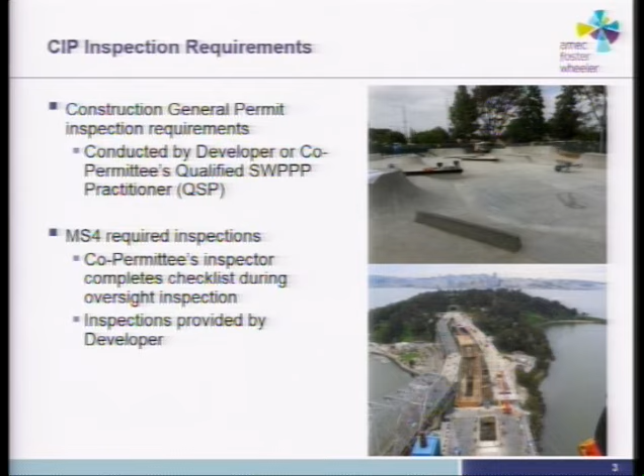A lot of the CIP projects, they have a contracted QSP on site. So a lot of the times the inspectors are really just providing the oversight, and I think that's pretty consistent with a lot of the other cities and county facilities, that really you're providing the oversight of the QSP. So you're really using your MS4 program to provide that oversight.

You go out at a frequency based on the MS4 permit to make sure that they're filling out their documentation and making sure that they're doing what they're supposed to be, and doing your inspections based on that. We had a couple of projects that I'll just bring up briefly.

One of them, we had a project that we were providing oversight for. This isn't the city of Anaheim, but it's another project for the county that had the sampling requirements. This was a risk level 2 site. The contractor ended up not having sample kits. They weren't really prepared to take the samples. They didn't have a field meter on site. The staff used a consultant to come in and do the sampling.

So because they weren't prepared to take the samples, the developer ended up just putting little plastic cups all over the site with the runoff. So it's an example that you really need to make sure that the actual staff is prepared to actually take the samples on time, make sure they're taking their pH samples.

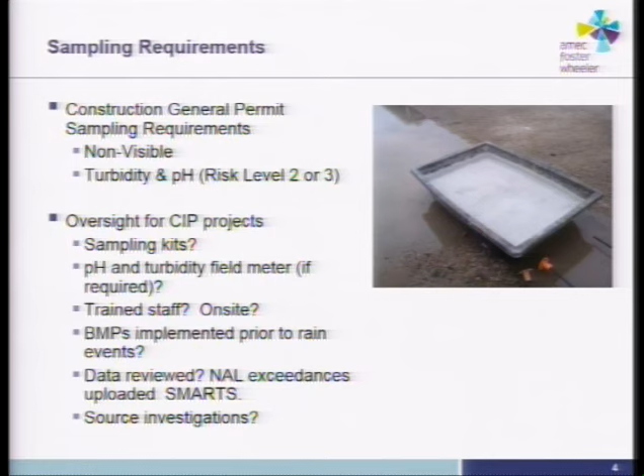In this particular case, we caught this ahead of time, but you need to make sure, just because you hire a QSP doesn't mean that everything's being done correctly. You really do need to have oversight over the QSPs. And it goes back to the city of San Diego on their $3.2 million fine settlement agreement. This is really important to make sure you have that proper oversight.

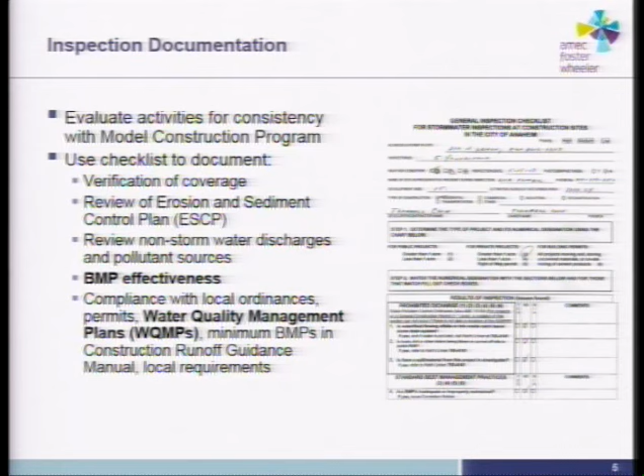So for the city of Anaheim, they have the checklist. They're evaluating the BMP effectiveness, verifying coverage. So that's all part of your inspection forms when you go out and do your inspection.

During one of the audits several years ago, when the city was audited, they had the inspectors go out, and one of the findings was that when they did the site walk, the inspector didn't actually do the entire site perimeter. So that's also important, that when you're doing your actual documented BMP inspection, you're going out and doing a full inspection.

So a lot of the times the inspectors are out there all the time, but they're not doing their documented inspection per the stormwater MS4 permit requirements. So make sure when you actually do that inspection that you're doing the full site walk, fully evaluate the BMPs and so forth.

And then the other issue, what we have found in recent time, is the water quality management plans, to make sure that they're being protected during the construction phase.

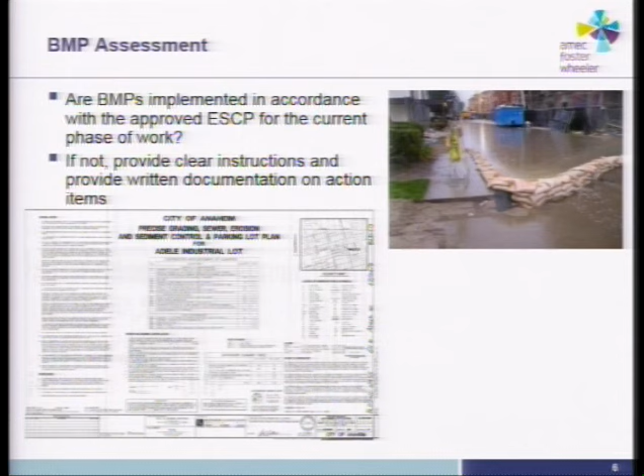So during your BMP assessments, just really make sure that they're following the erosion sediment control plans, especially when you're evaluating private construction projects. That's really what you're evaluating: do they have an approved erosion sediment control plan. That's what you'd enforce on if they're not implementing the BMPs for that. So review that erosion sediment control plan and make sure that the BMPs are adequately implemented, in particular for the phase of construction that they're working on.

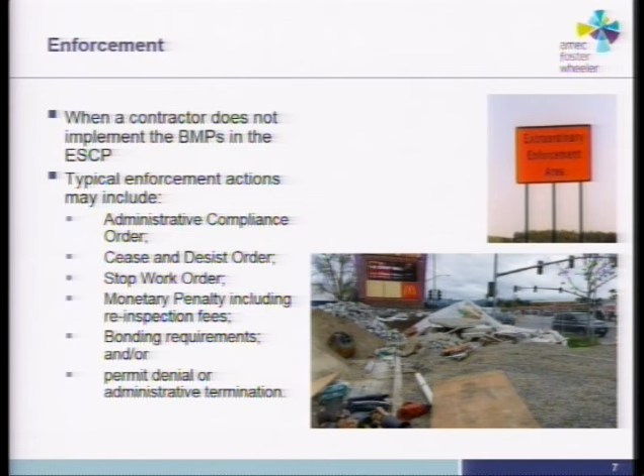And then, as mentioned, the post-construction BMPs. These do get impacted. The porous pavers do get impacted if you put them in the initial phases of the construction. So make sure your erosion sediment controls are actually protecting the post-construction BMPs that you implement.

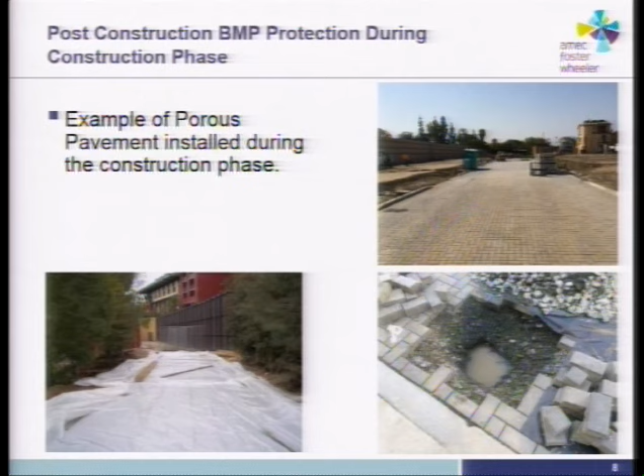So this is an example of why, during the construction phase, it's really important that you implement the proper erosion sediment controls, including protecting these BMPs, especially the infiltration type devices. In this particular example, it was more cost effective for them to put in a dry well at the end instead of ripping out the whole BMP and starting over again.

So some examples: they can put in the visqueen, cover it up to hold it down and protect it, put some sediment over that, a rock over that they can drive over. I think that's what some of the contractors have been doing. It's really up to the actual contractor to come up with their own plans. If it's a contractor, they should be coming up with their own plan as far as what they need to do. We just need to make sure that during your pre-con meetings, you go in and make sure that they're following the erosion sediment controls, and that they know this is going to be an issue, especially for the post-construction BMPs at the end.

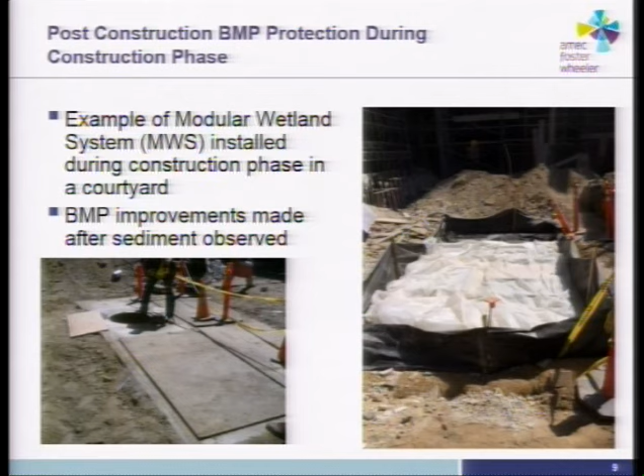So some examples of why you really do need to pay attention to these items and make sure that they're protected. And that is my short presentation of the city's perspective, to get you out on time, and if anybody has questions, provide them.